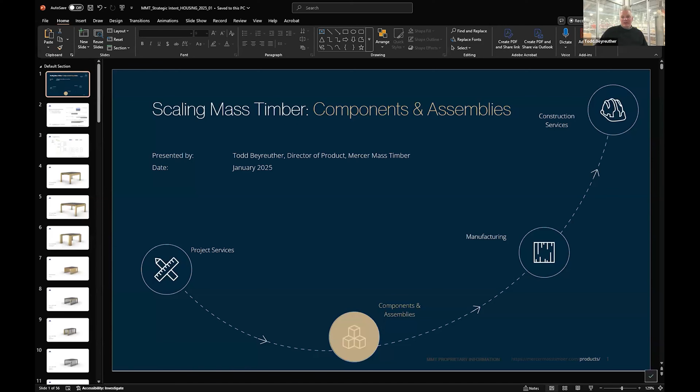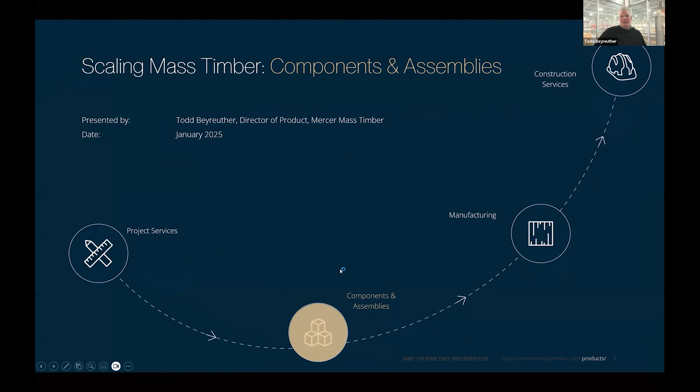So I thought it would be fun for me to show some of the work in progress. So often we're presenting our companies in terms of the projects and the things that are in motion and competitive advantage on the project side and manufacturing. But my world is more of components and assemblies and trying to bring materials and things to markets we maybe haven't developed yet and maybe aren't the bread and butter of what you see behind me, which are more standard big commercial office buildings and institutional buildings and so forth. So that's still our sweet spot up top, like others in the blue.

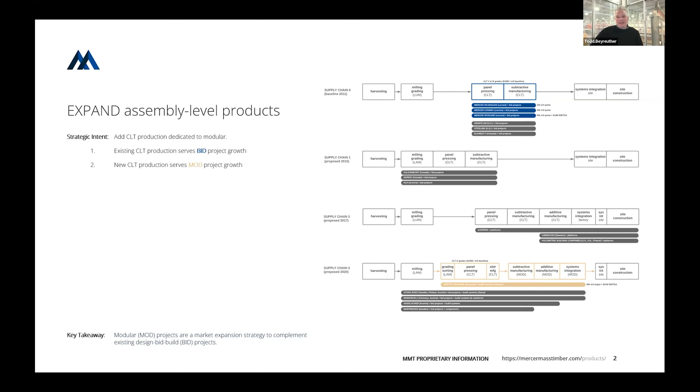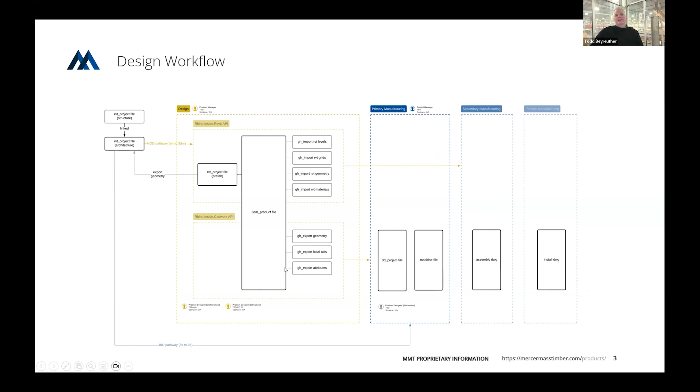But a lot of my focus lately has been on how we get into housing, industrial, and I know that that's shared by others on this call. In that, I've been spending all my time exploring different workflows also, not on the bid pathway, which is typical IFC to cadwork to machine file, shop drawing, so forth, but rather really diving deep with Rhino.Inside, Grasshopper, doing a lot of the scripting stuff that we've been doing for years in architecture and structural engineering, which is my background. But then finding those workflows with Rhino.Inside Revit, Rhino.Inside cadwork, and trying to grab more of the APIs, and it's working. It's been fun and it needs a lot of engagement back and forth, even contractually, to figure this out.

So obviously, big post and beam, bread and butter, interest in two-way, hybrid. Going really fast just because I'm just trying to get to some of the interesting R&D stuff we're doing. We do have a strong interest in cold-formed steel, bearing walls, so forth. But if you joined us last year at the Mass Timber Conference, I displayed a couple different structural build systems, and what these really were was test specimens. So we took 2 of these and we're trying to find the spectrum between load-bearing CLT walls all the way through what I call light timber framing with CLT.

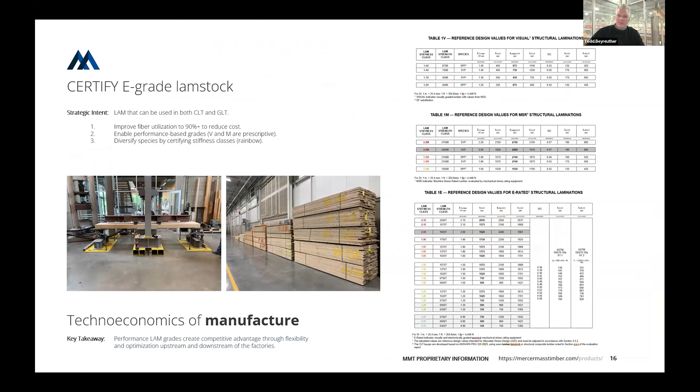And we're trying to bring everything from the material, the components, the assemblies, and maybe even the systems through different code pathways. And I'm just going to go quickly through this because to get there, we need to focus on some of the grades of material. And what we're going to work on in the next grades we're bringing to market are electronically graded E-LAM. And so I'm going to come right back to that after I get to some pictures from the lab. I can also touch a little bit on the LCA work we're doing from the sourcing.

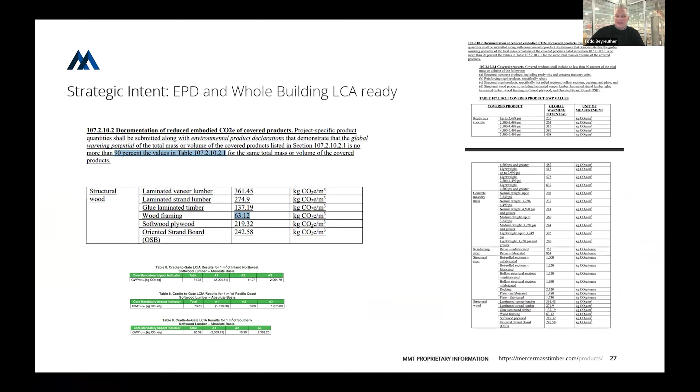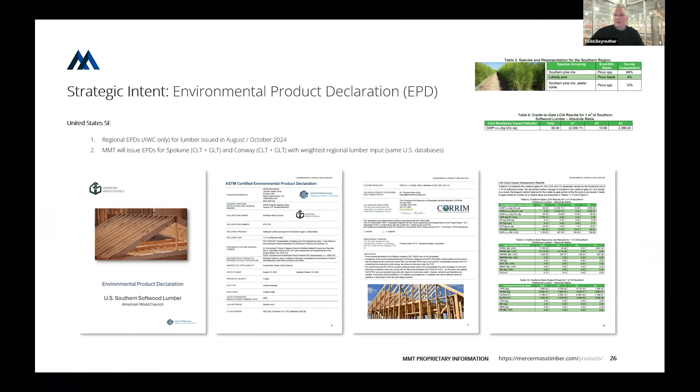I'll stop here just for a second because what I just blew by was, if you're tracking the recent AWC EPDs for lumber, I'm really excited that collectively we're getting to regional sourcing so that we can start to account for LCA from whether we source from coastal US, inland US. We're working on inland Canada since our proximity in our Spokane and our Okanagan factories, and then of course the

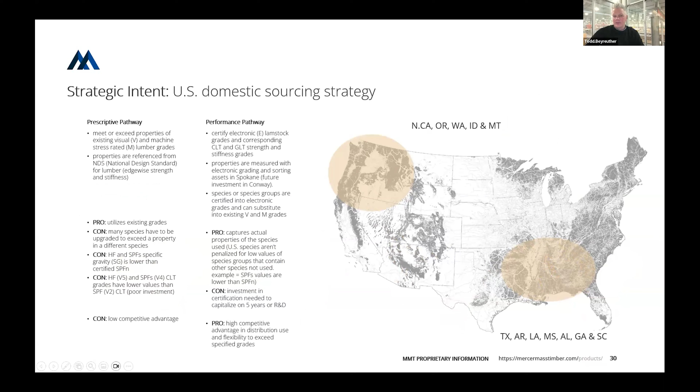Southeast. And I don't mean this to be a presentation on environmental impacts, but because we have factories in both these corners, it's of a lot of interest to us to really start to dial that in, working longer term with partners on whole building LCA, all the way to mill and factory specific.

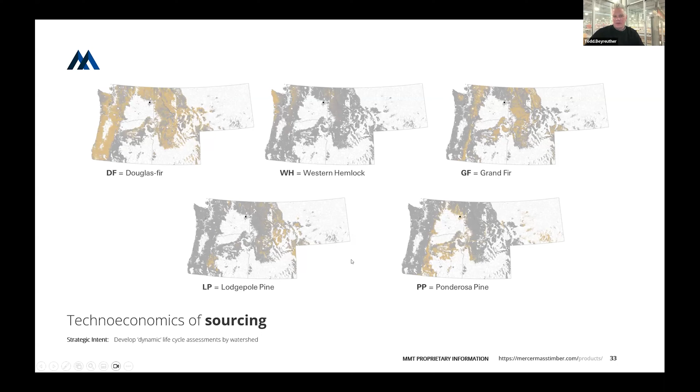But where I'm going with this is the ability to use different species and try to move the market more towards a performance-based specification that allows us more flexibility. I'm just showing the Pacific Northwest, but this applies to the Midwest, to the Northeast, when some of the different species that aren't as common in our mass timber products. And so in that,

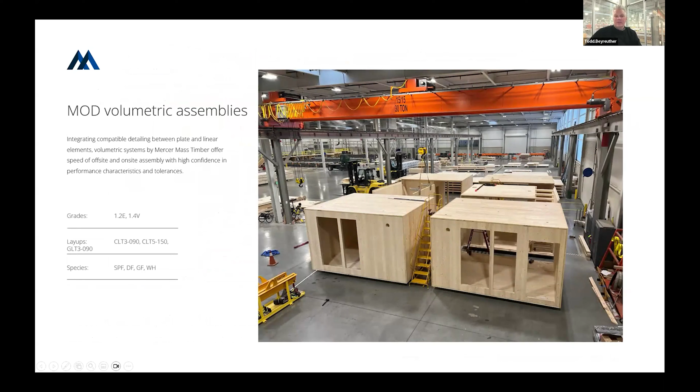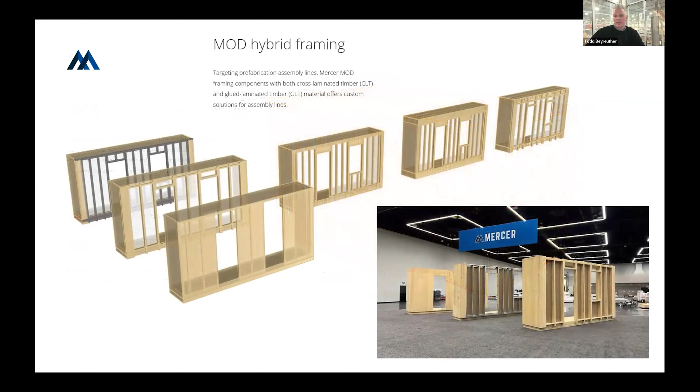when I want to show some of the work in the lab, modular is one of those target markets that I mentioned. Obviously industrial and so forth, but I think they all go together. But in the residential space, that leads us to thinking about certification of components, and those might be CLT and glulam framing. So the studs, the posts, the sub-assemblies that start to displace bundled studs and others

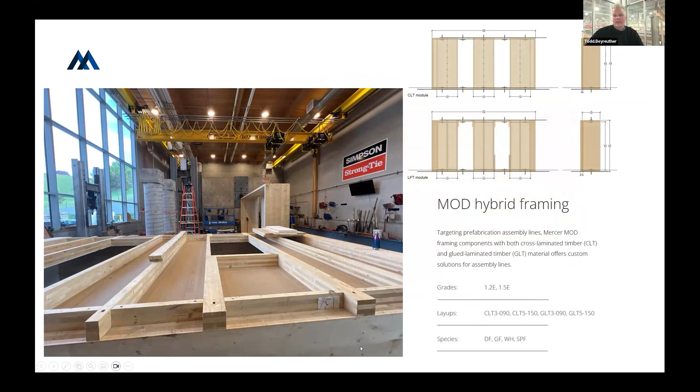in light framing. But this is what it looks like, and this is what we're testing under some federal Forest Service money. So in the lab, we're trying to get towards more European type light timber construction. This is from Finland. We're thinking about how we might reimagine decks.

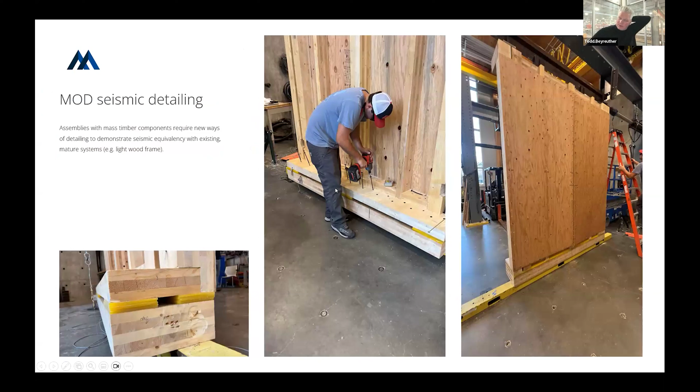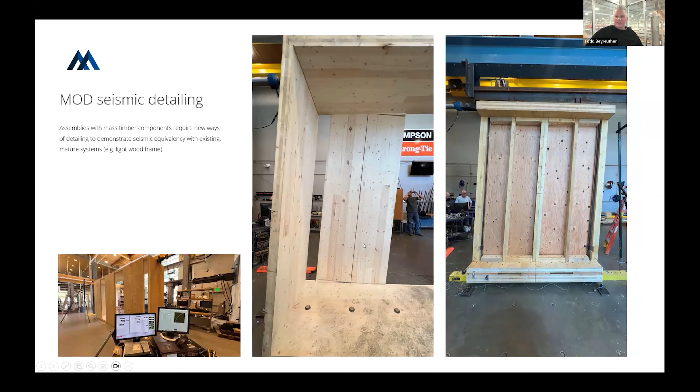But this is the main target right now, these shear wall systems that are equivalent with CLT studs and CLT framing. This is a whole different presentation, but I just want to put out the way we're thinking about this is to try to get to equivalency of light frame walls integrated with our mass timber systems. And then this is fresh.

This is yesterday, taking some of these studs that are ripped out of the panels along with the bigger plates, and I have the preliminary data. I'm not ready to disclose it yet, just because we need to go through it. But really pleased and excited with where these strength properties are starting to land. And I think this will tie in a little bit later when Tyler and others start speaking, because this is kind of a real specialty of theirs also in getting into framing components with their product.

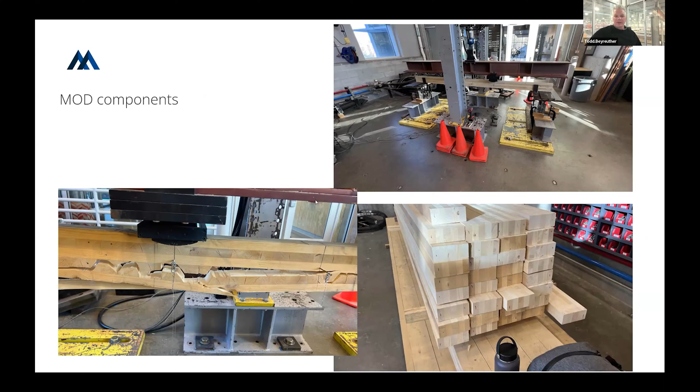So I'm going to quickly skip to what I would like to show more at Mass Timber Conference, and these are works in progress. I'm showing you right out of InDesign, but back to how we get there. And we think with our current grading capabilities, we want to make this open to the industry, that we can start to move towards a stiffness and strength class of the lam stock, but also of the material of CLT and GLT. So I'm showing you, these aren't real.

So PLIB, if you're watching, I'm giving a little free plug here, we think this is one of the agencies that can really dial in with us on the left, the proposal that we're doing tension lam stock in both CLT and glulam products, but it doesn't exclude MSR lumber or visually graded lumber on the right. So we can still use the NDS lumber values and qualify into those stiffness and strength classes.

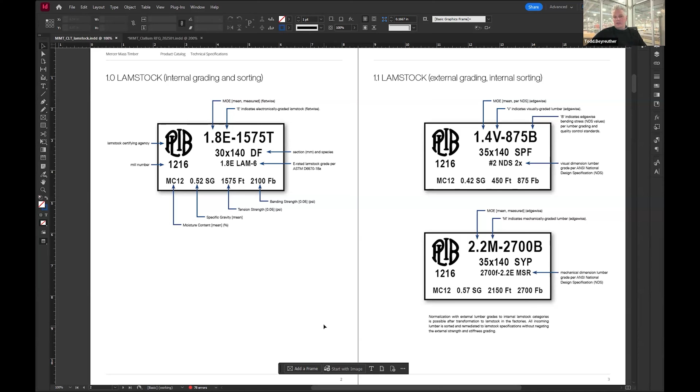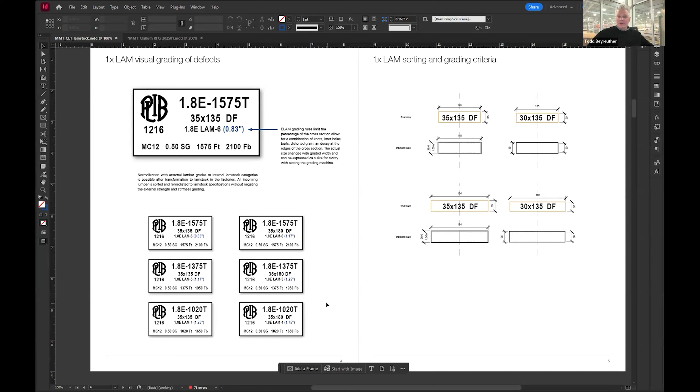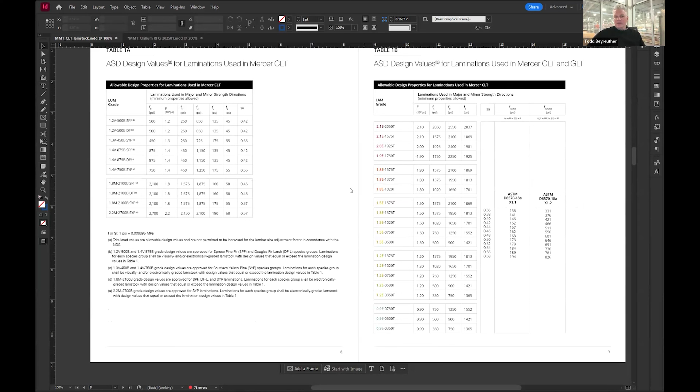But what it requires from us as engineers and architects in particular is that we start specifying the performance requirements, not so much of the lam stock like I'm showing you now, we'll take care of that part. But as we start to get to the CLT, it allows us a lot more flexibility in the different grades of lam stock that we can put into the CLT, and we can move towards something that looks like this in

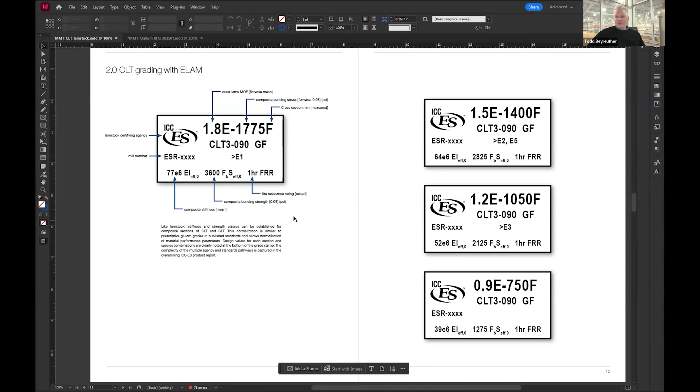an ICC-ES report that is a stiffness class of CLT with a strength category, a lot more like we think about glulam. And then in this, you can see the CLT 3-ply 90 millimeter, and then that species specific that qualifies into this stress class. So this isn't real yet. This is the proposal, but we are moving towards that type of grade.

And then what that looks like is we can still have our V and what prescriptively in the PRG 320 we call the E grades. I call them M grades because they're MSR, but then it also opens up for this rainbow of designing towards stiffness first, the different colors, and then within each one of those different strength categories.

So I'm going to stop there. I know that's very geeky, but I thought maybe this was an ideal forum to throw a bunch of ideas out for feedback. And please find me before Mass Timber Conference, but also love to talk and get feedback and criticism on this. A lot of this is also informing some of the work that I enjoy and spend a lot of time at the code level.

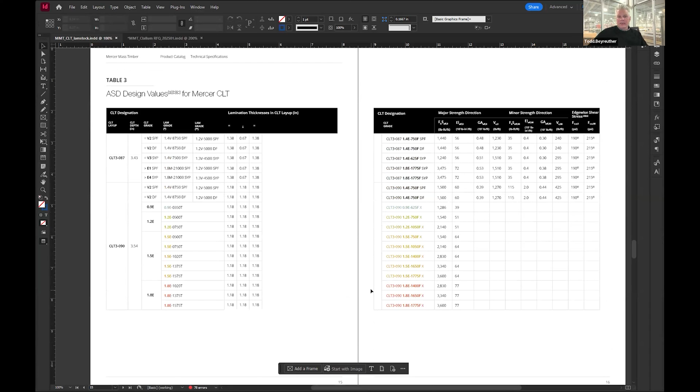I'm currently on the State Building Code Council in Washington, and we've been working on a couple proposals, and one of those is to allow more of these flexible lam stock grades in CLT.

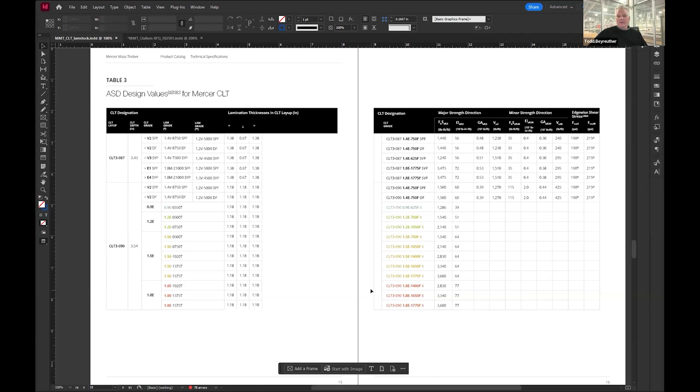So okay, I'm going to take a breath. So thank you, everyone. Great, thanks, Todd. I think the next person that will pass the baton to here is Tyler. So Tyler, if you want to go ahead and share your screen next. Certainly. Is that working, everyone? Yeah, we see that. Looks good. Okay, well, for some reason I'm not going into presentation mode, but there we go. Okay.

So one of the things that people always talk about our product is that it looks a little bit different than CLT. We are CLT. We're approved under the same PRG 320 code. We have additional requirements under ASTM D5456 to qualify our material as an LVL grade or structural composite lumber. But it does lead to a different characteristic when it comes to implementation in a building.

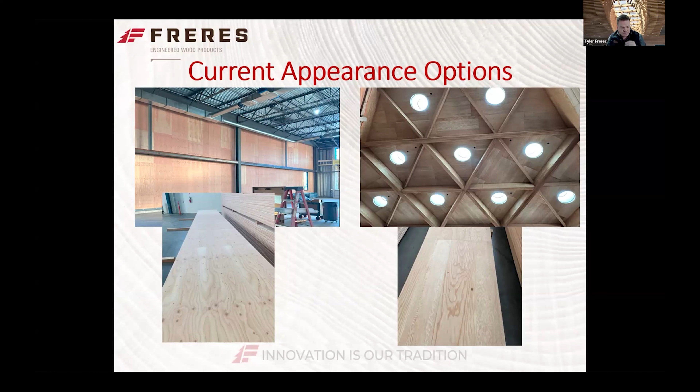But we're working on a couple other things here, and this is something that we've been implementing for a little while, but it's really coming to fruition, where we essentially break our 4-foot wide panels down into smaller subsections and then reintroduce them into the system. So what that allows us is that you can end up with much more of a board appearance like you would have with a typical CLT product, but with the same type of performance that you would get with a built-up LVL panel.

So to be clear, the one on the left is exactly like how we make our normal material, but just the outer layer is broken down into more randomized boards, so you can end up with a little bit more of a randomized appearance, randomized hues and tones throughout the entire material. And the one on the right is exactly like our HD material, where we've done the same thing and broken it down into separate sections to create that kind of randomized appearance with hue.

A couple other things we're working on is an edge grain appearance. And we actually have this in place in our warehouse structure on our own site. And it's a beautiful type of appearance. Unfortunately, at this period of time, we can't count that outer layer towards our structural performance. We know it adds to it, but we essentially have to be a monolithic sort of layup with all of our LVL grades within a material, and it's really difficult for us to get qualified with adding this sort of differing grain pattern within an MPP panel.

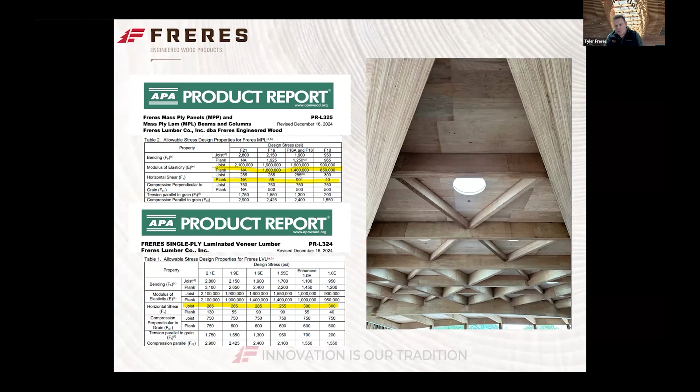So our 1.0E, if people aren't aware of it, that's typically a material that we use for a point supported slab. So something that has two-way action within it. It has about the same performance across the minor force direction as you have it with the major, but I'll jump into that a little bit more too.

Recently, this last year, we completed some additional blast testing with the Department of State and the DoD. I figured it's always fun to show a video of something exploding.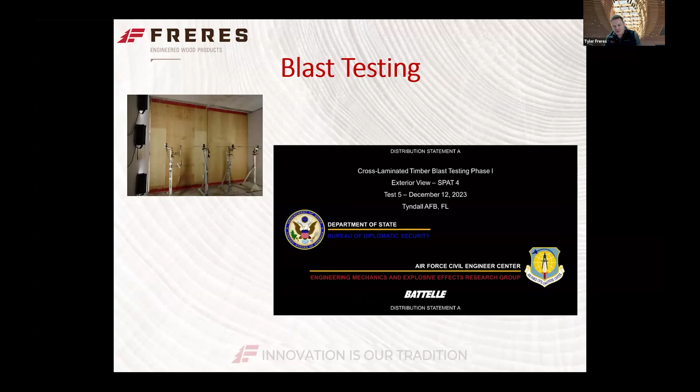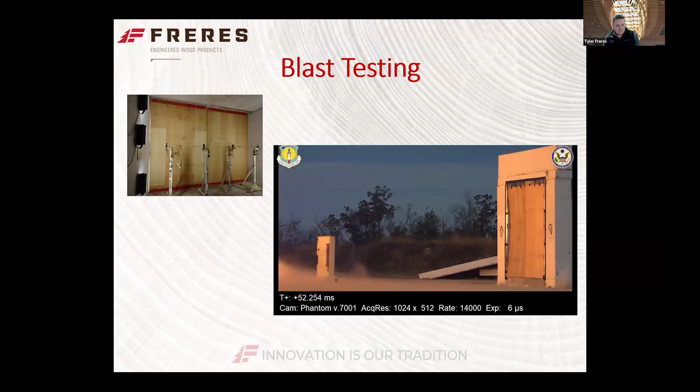So in particular, the two materials that they tested here were a 4-ply or a 4.08-inch material, as well as a 6-ply or a 6.12-inch material. The 4-inch did fracture across the middle section of it, but still was considered moderate damage. But the 6-inch, there was no significant damage whatsoever to the panel. And these tests were all conducted under the auspices of the Department of State at the Tyndall Air Force Base in Florida.

So luckily this last year as well, we were able to complete a point supported slab testing down at Oregon State University with the REACTS program. Got to thank Ian and the rest of the team down there for helping us coordinate this testing. It was really important for us to get this in the works. And I can happily say that as of yesterday, we've received the final non-draft report. So that's available if anyone has any interest in point supported slab for multi-story construction.

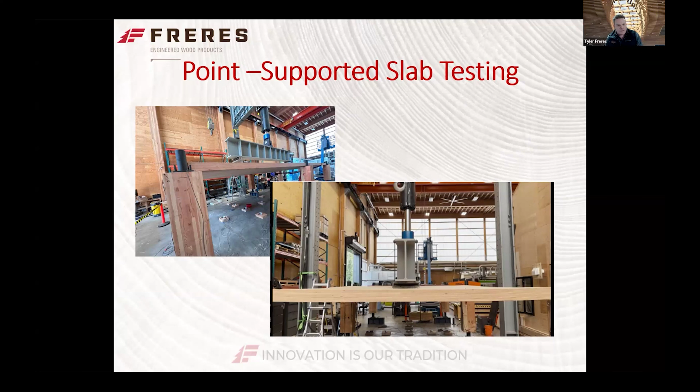So essentially, we ended up testing those panels on a 12-foot by 16-foot grid. The panels themselves were 12-foot by 32-foot with a 5-ply and a 6-ply. You can kind of see some of the performance results there, but at the end of the day, we were able to substantiate a 12-foot minor force direction span, 16-foot major force direction span with a 6-inch panel.

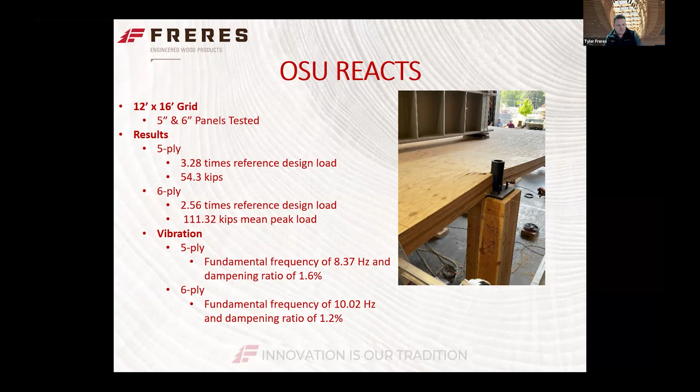This is a project that we just finished shipping the last panels to, but I figured it would be a good example to show you guys as far as what we're able to do with our mass ply lams as substitutes for glulam material, but also with our large format panels. These were very thick panels. A lot of them were up to about 9 inches, and so were the beams. The beams are sistered together into 27-inch wide sections, and they're all on a curvature over the entire roof.

They also chose to go with our high HD appearance. So this is predominantly a clear veneer roof and also on the beams themselves. So really nice aesthetic, and really one that I'm looking forward to visiting in person here in the near future.

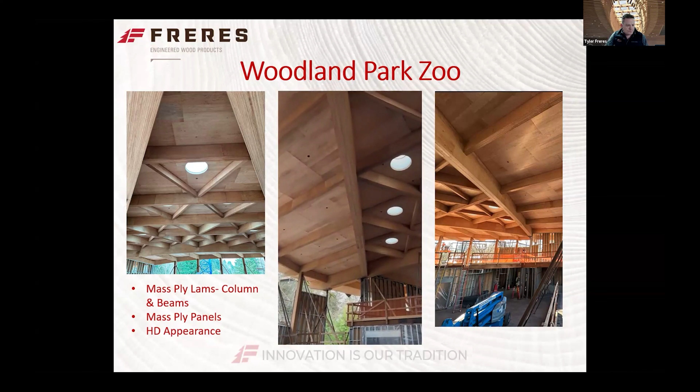One of the areas we really want to get into is our warehouses and data centers. It's been the talk of the town—the amount of investment in infrastructure they intend to put into data centers here in the near future is mind-boggling.

As we all know, the tech industry creates a lot of environmental issues from consuming a ton of energy and using a whole lot of rare earth metals.

So they've got to find some way to get a little bit of environmental virtue into their system. Wood structures are a great way to sequester carbon right at the beginning of the building, so we're really looking at these types of structures.

This warehouse is 59,000 square feet, with a grid structure on a 40 by 48 foot layout. The walls were done much like concrete tilt-up construction, with no exterior beam or column—the exterior walls are 4 inches, and the roof joists are supported by the walls.

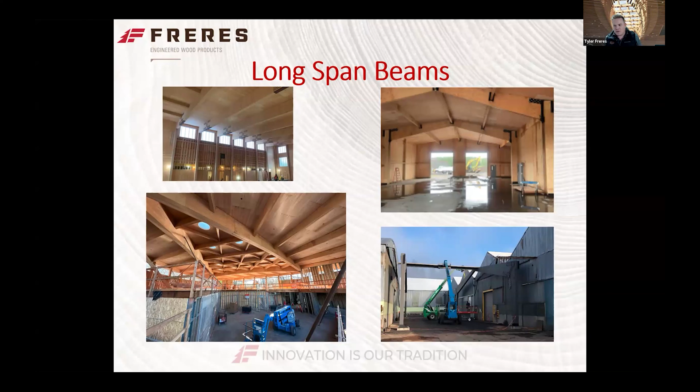So with that is about all I have. Thank you guys very much for your time.

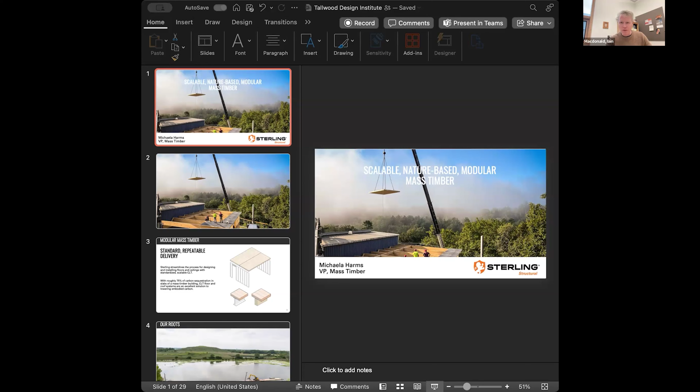Hey Michaela, you're not in presenter mode. We're seeing it dark. Oh, I'm so sorry, I'm seeing the thing. It's not in presenter mode. Sorry about that, you guys. No worries, thanks for letting me know. All good, let's see—this is funny, I've never had it do this before. There we go, let's see if this works. Is that now in presenter mode?

Yep, it's all good. Okay. Thank you so much. Thanks for letting me know. We're a Teams group, so sometimes I'm not as good on Zoom.

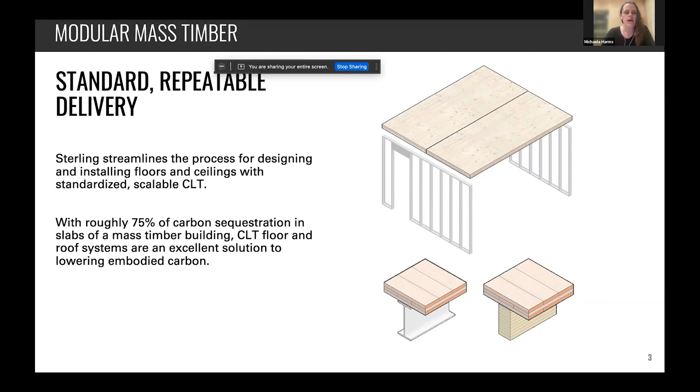So Sterling, we're really focused on how we can standardize the CLT as a product specifically for scale and repeatable delivery. We think it's a great opportunity for our built environment from a sustainability perspective, because if we look at mass timber buildings, about 75% of that carbon sequestration is really in the slabs, in the floor and roof systems. So that's where we try to focus. We try to be a little bit more agnostic when it comes to beams and columns and things like that, and working with lots of different partners, but really to get this into as many building types as possible.

And this mentality towards modularity really comes from what our roots are. Sterling's been manufacturing CLT since 2015, and we are the largest manufacturer of CLT in the world, but the majority of that currently, not for long hopefully, but currently goes to our industrial matting business. This is a really cool application of cross-laminated timber and wood products that not many of us see every day. There's so much infrastructure development out there, and this material uses forest resources, and we're not treating these, so we're not introducing anything into the environment. It's just a really fun, exciting other part of the mass timber industry that we don't talk about very often.

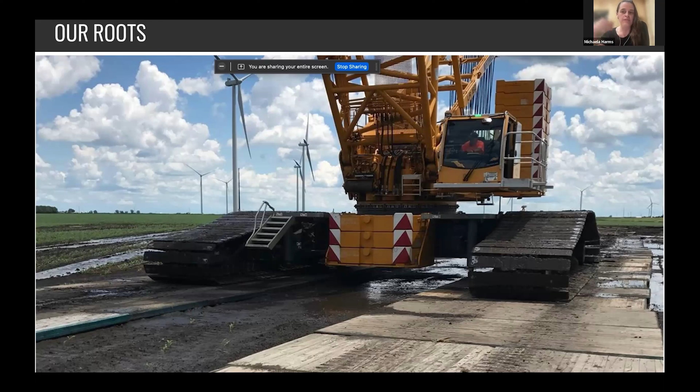So I always like to go back to our roots. The reason I go back to it is because, as you can see here, these are just many, many, many rectangles. Our manufacturing facility is set up to produce at this type of volume. We make a panel every 65 seconds.

So when we think about that, we go, all right, how can we start to make more of a module approach, a productized module approach to the mass timber industry, so that we can get into really scalable development and use that ability to produce very quickly, and get this product into more building types and a wider construction market. So how can we compete with steel decking and precast concrete and all of that kind of stuff?

So the industry, from the steel decking perspective, is very used to specific sizes and working off of those type of modules. We run on a 14, 16, and 18-foot length module, and that's all based on the existing lumber supply chain. We're one of the largest private purchasers of Southern pine, so we get great pricing. We're able to then just take that 14, 16, and 18 foot, and then 8 foot in the cross layer stock lumber that is sold for many other uses, and bring it right into our line and turn it into our cross laminated timber.

So that's what guides the initial modules. And now we're really working with designers to say, okay, it's great to be able to make these very complex CNC structures, but it's not the most cost effective, and it's not the most waste effective. So how can we start from this module and maybe limit fabrication first to 50% of panels, and then maybe limit fabrication to 20%, and then maybe even 10%, so that it's becoming more of a distribution commodity style product.

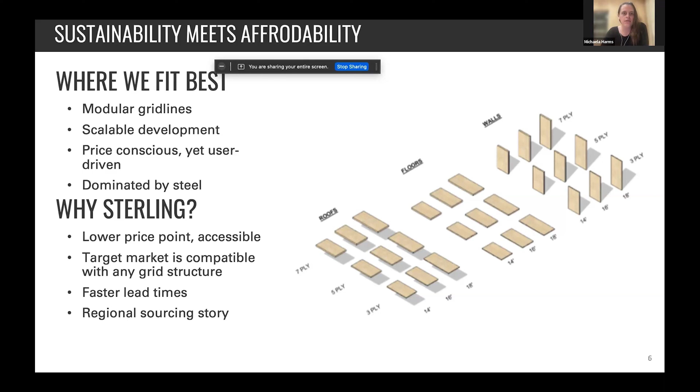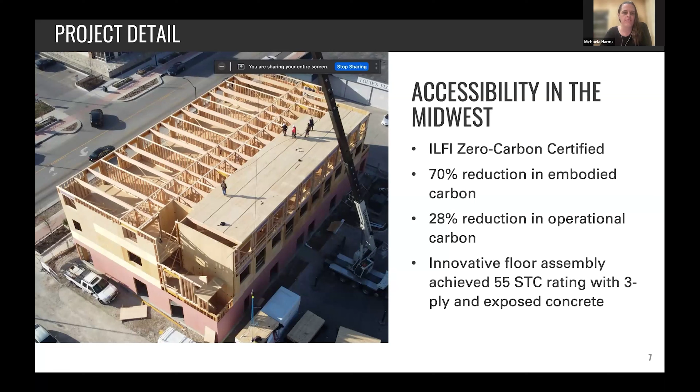So the first project we'll look at that is kind of taking this approach is from Cutler Development. They're a development team based out of Des Moines, Iowa. When we talk about affordability, when you're in the Midwest, affordability and affordable housing is a very different point than on the coast. They've really done an excellent job of looking at what the formula is to get mass timber into their buildings and make it pencil.

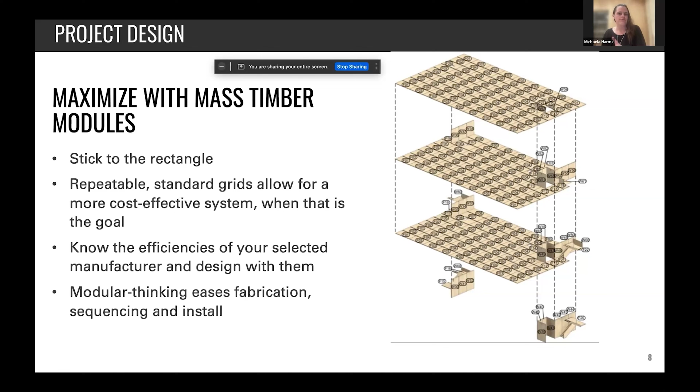So we worked with them again to kind of maximize their construction with that module approach, focusing on those repeatable standard grids, and understanding the efficiencies from our perspective and working with their design team so they understand kind of the design for manufacture. Where does it really make sense to add in that extra fabrication, and where does it make sense not to do that?

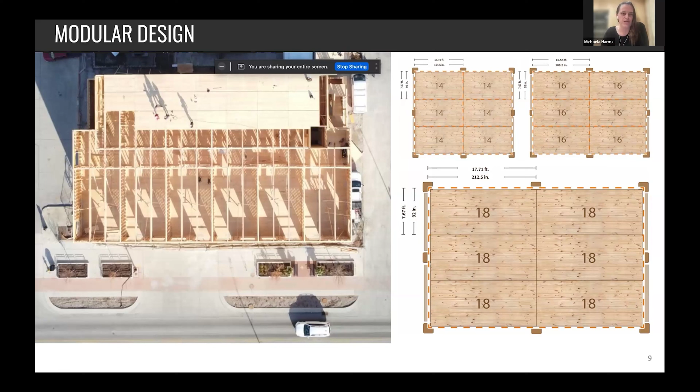So you can kind of see here, based on different grids and different building typologies, how we can look more at starting with that module from the very beginning to create these very repeatable elements that are also much easier from the logistics and sequencing perspective, because now not every single panel is an individual custom panel. So we work with these teams to keep it very repeatable, and balance all of that, working with other installers and GCs to be sure we're doing the things that make it the easiest on site.

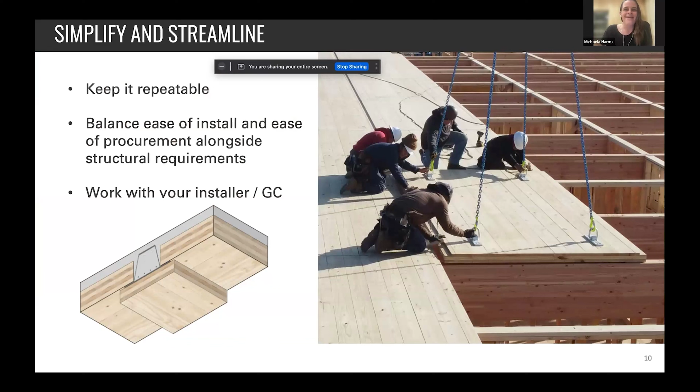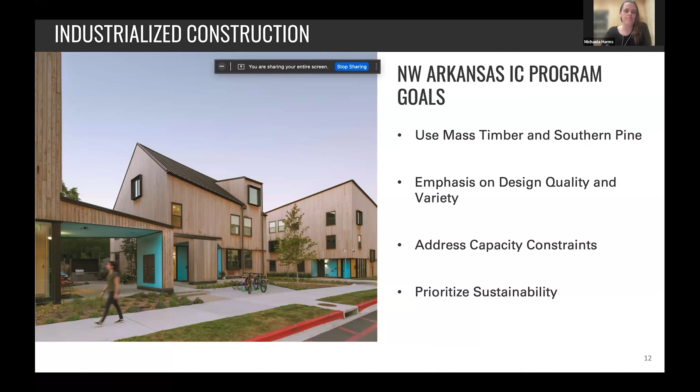So a second approach that we've been working on is more from the industrialized construction program approach. This one is out of Northwest Arkansas, and this team really wanted to use mass timber. They wanted to support Southern pine, and they're really prioritizing sustainability to bring in a good workforce. How can we make housing and environments that people want to come live in, because they have such a need for workers in that region, and bringing more people in.

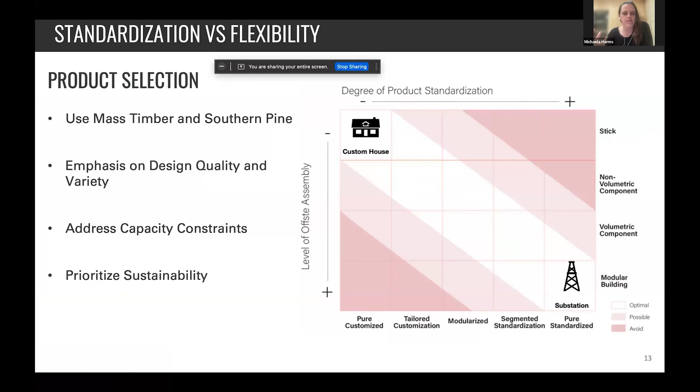So we talk about this kind of level of product standardization versus level of offsite assembly, and this is really how we started to build out this industrialized construction program. We really wanted to take a more productized and panelized approach, looking at the CLT floor systems alongside modular bathrooms and kitchens, which made a lot of sense for this specific construction type. It's a little bit more optimal for this specific project than a full volumetric dwelling unit.

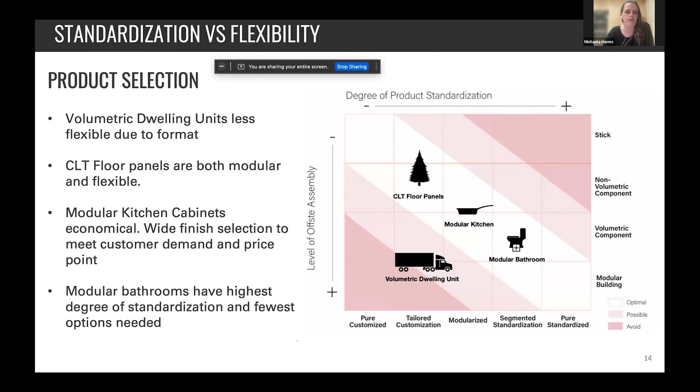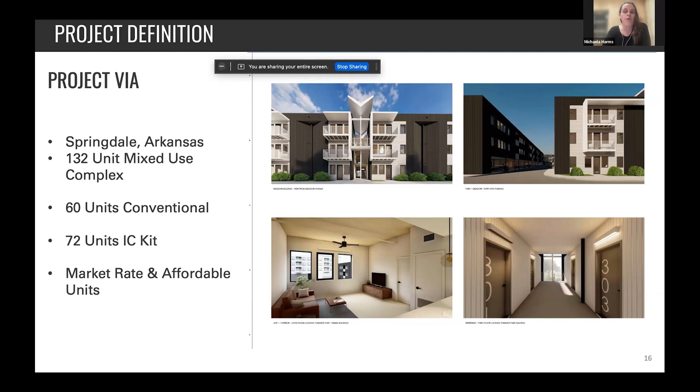We worked on this with an excellent team - Aspect, Modus Studio, Modly, Blue Crane's developer. It's 60 units of conventional construction. This is a really unique project in that half of it is 2 buildings that will be stick frame, and half of it is this industrialized construction approach. The developer is actually going to release all this information of what they learned as a cost comparison for both of these approaches on the same site, which we think will be very exciting, and hopefully something with release through Woodworks.

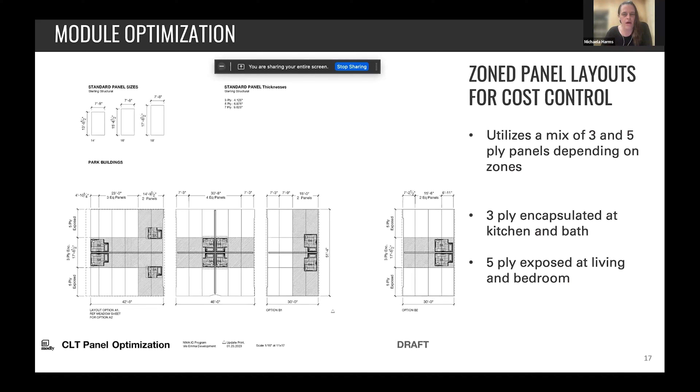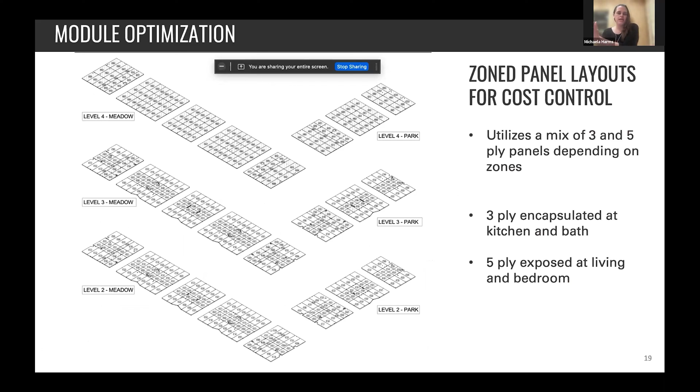But as we looked at the productized approach, we really broke it down by zones with this team to look at optimization of mixing 3 and 5 ply panels for the zones where they were required. That really got this one to an excellent price point to make these structures a bit more affordable. Here's some examples of test fits for those different areas, and seeing how that module extends all the way through the different levels of these 2 buildings.

We all know this, and I don't think we can say it enough. Contracting early and getting the design team - the architect, engineer, and construction teams - together early tends to really help keep these projects streamlined and going forward quickly. What we found was, with this project specifically, is at this point, we're already within 5% of the stick built cost. So we're excited to add in what we think we'll get out of the schedule gains.

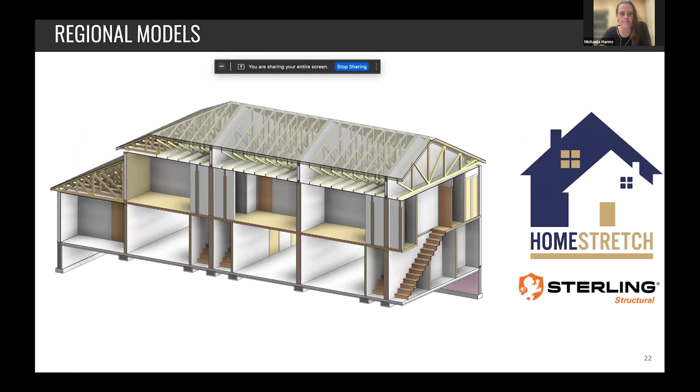Contracting early, planning long, and executing fast is really the name of the game when it comes to this industrialized construction program. Last but not least, this is right in the Midwest. We've been working with Homestretch Development. They do exclusively workforce housing currently in Michigan. He was another great approach of, hey, where can this make sense within my building? So for all of his projects, we're focused exclusively on the floors - it's a mix of SIPs and traditional stick frame and CLT floors.

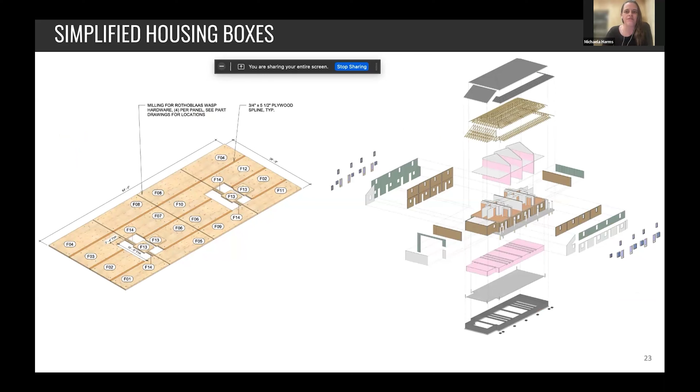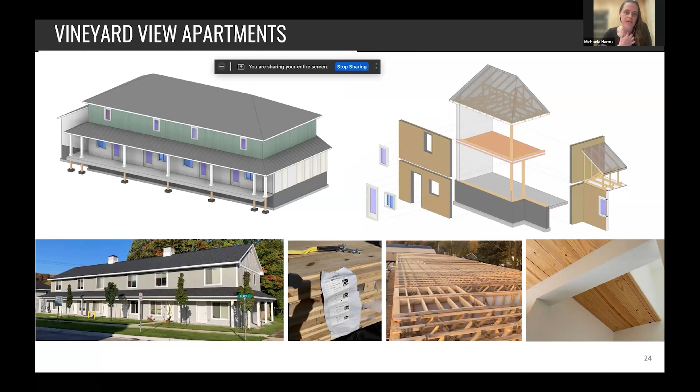It's been really cool to see how all of his specific projects are coming together. We're looking now, as we've built out this program - I think we're on our 5th or 6th building with Homestretch, incorporating Michigan wood into the project.

So why we talk about contracting early is because manufacturers, especially when they're able to work with the architect, engineer, and construction teams, can offer a lot of these extra design assist, project management resources that if you're in with the collaboration early, you get the most benefit from. We learn a lot. We still do projects where we come in late and we learn that it's just not as efficient. So we're trying to work with these teams to continue to build out better collaborative and early approaches here.

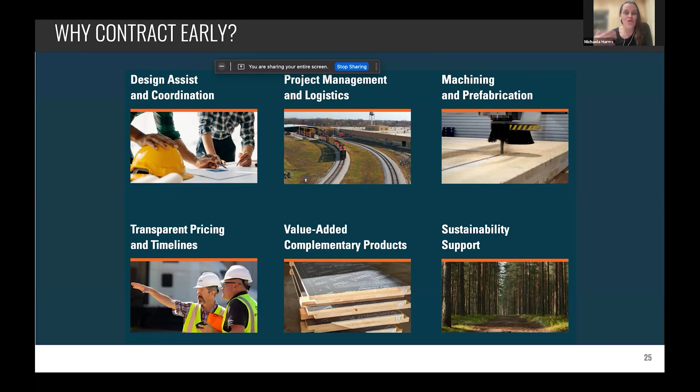So I'm glad that Todd is bringing up the different species and some of those more performance-based metrics. Obviously Sterling is a little bit different in that approach, that we're trying to buy exclusively #2 material directly off of the market. Right now we're selling Southern Pine out of the South. We've also been certified now for Spruce-Pine-Fir South, and have been focusing our sourcing for those in the upper Midwest, the Great Lakes region, and New England, and then also Eastern Hemlock from those 2 regions as well. By adding to our offerings, we're hoping to work with different teams that want to be utilizing their local resources directly into their projects. Sterling currently and will always buy 100% US wood.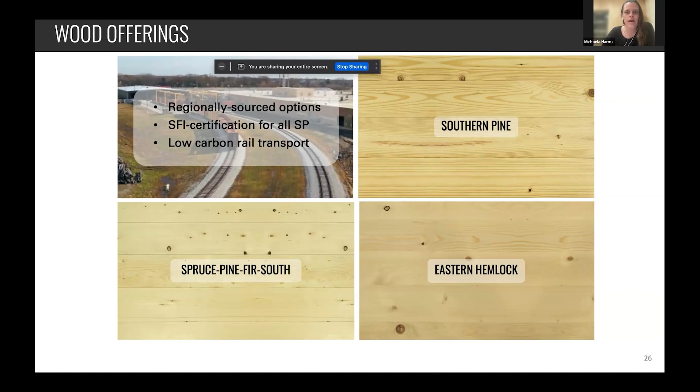And we try to work with glulam manufacturers as well who are buying US wood, again, to just keep that regional sourcing story present for these buildings. And so, from the specification standpoint, we think it's really important to make sure we're sharing with teams that they understand the impacts of those specifications.

I love the move towards a performance-based specification because it does give all the manufacturers the opportunity to put the best product forward for that project.

Because when we add on some of the extra certifications, sometimes that can really limit the supply chain, for example, or if we have a very prescriptive only-this-grade approach, it can really limit the opportunities of the supply chain. And that ends up making lead times a bit longer. Freight can be more complicated. There's an opportunity for infinite layups, but what's really available on the market?

So we try to educate teams on what we have available, what we know our glulam partners have available, what's available on the market in general, so that we can compare those things.

And we think certifications like FSC, SFI, and all of the extra things are great, but we also don't want that to be the reason that you went with European wood or the reason that you didn't go with wood at all. So it's important to really think about what those specifications can do to a project.

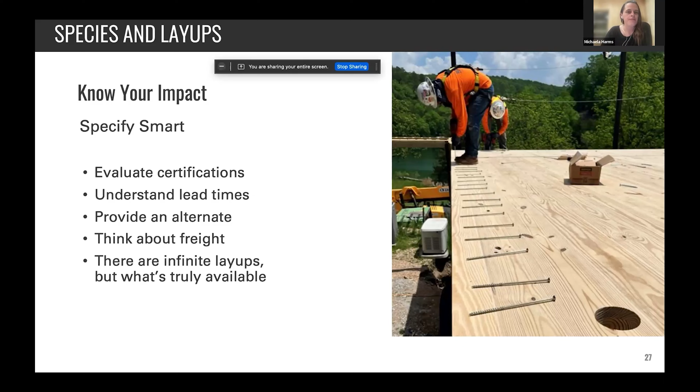And then finally, really comparing costs holistically. We're really excited about the industrialized construction program results because we'll be able to actually have real built projects on the same site next to each other, where we can compare that entire structure, the entire construction life cycle, and everything like that—and which off-site items are included in the factory versus not.

Those are things that we think really help that better comparison so that we know we're really going apples to apples. And then another big one is regional labor pools are so different in so many regions. So what we've learned is really getting those installers involved as early as possible can make the project more efficient.

It can help you understand—hey, if your MEP is really late, you really got to talk to your installers, because maybe they're better off cutting the holes for that stuff on site. It's not always the answer, but it's good to have that conversation early.

We had a project where they had wonderful timber framers on their team, and they bought direct commodity glulam and cut everything on site themselves. And it was great for that project, but I can tell you that doesn't work for every project. So having those conversations is important.

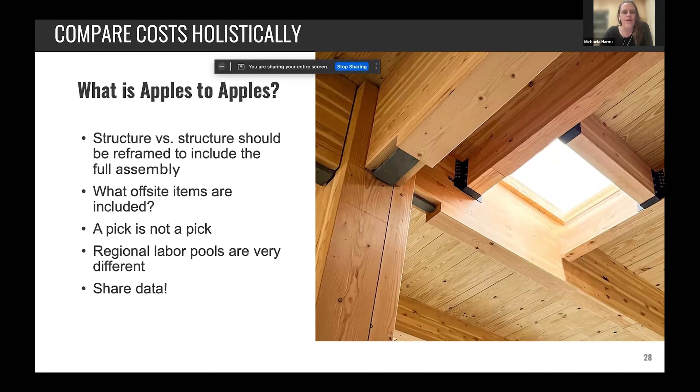And that is where we are at currently. So thank you so much.

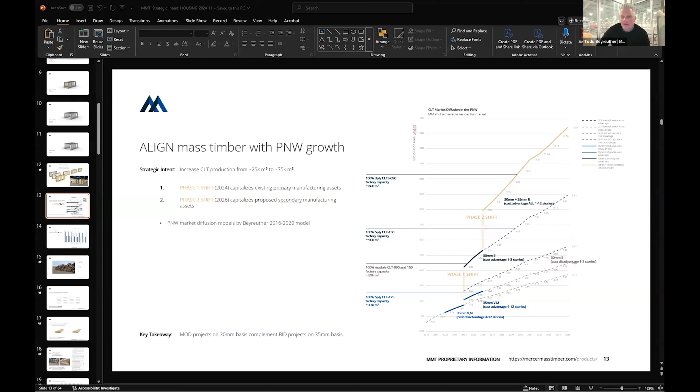Todd, do you want to chime in on that? Well, if you entertain a diagram, so yeah, we need to grow the market. We're not an industry yet, and by definition we're less than 5% of the market, which means we're very good as an industry saying, hey, we like doing these big commercial, institutional buildings because they compete with steel and concrete construction types, so they're cost competitive, and they are.

But how do we become cost competitive in industrial? How do we become cost competitive in housing? You're hearing a common theme there from all the manufacturers. And I show this diagram, and it probably needs a little more unpacking, but we've done market diffusion models collectively, the state of Washington with University of Washington and Hartwood at the time, and believe the models or not, but the intent here is shown on the bottom: we're in this pathway of slower growth.

I know you see a lot of hockey stick diagrams of the market and so forth, but you also have to look at how fast a product diffuses into the market and what we can do to accelerate it. And so some of the common themes you're hearing about, like Sterling saying, here's the strategy of standardization, of trying to drive down that cost. I was recently reverse engineering with a partner who was looking at multiple bids, and they all landed in about the same ballpark, and they said, oh, they're all 3% over.

And if you were a mature technology, you'd say, well, we're losing. If you're an emerging technology, an investor would say, all right, that's what I'm going to put my money into. You're winning, because now you can pull 5-10% out in an emerging technology, and scale is one of those strategies, but good design is also. This is my hockey stick diagram, but it just doesn't happen. You have to invest in those phase shifts.

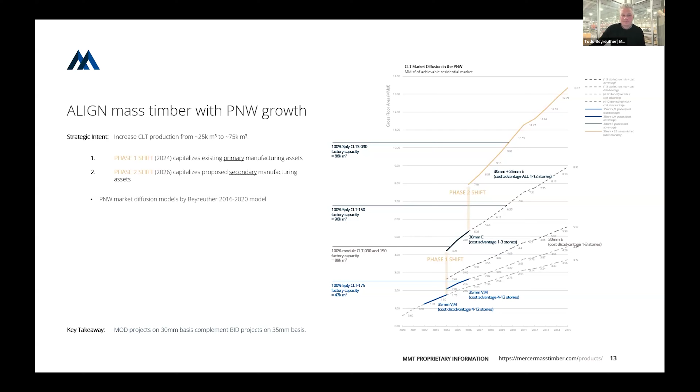Right. Thanks. There's a question in the chat from Carmichael, who says, "Do we have examples of housing projects in the Northwest where these products have been used?" Carmichael, I don't know if that's aimed at a particular company's products or just the products you heard about today, but care to elaborate on that?

Hi, everyone. My name is McCrae Carmichael. I work for the Mid-Willamette Valley Council of Governments, and I'm also the executive director of our Economic Development District for Marion, Polk, and Yamhill counties. And all the districts are working on housing projects, how we assist our members with having more housing. So I'm new to mass timber. It's been on the periphery. I'm curious. Somehow I got to this meeting, I'm listening, and I hear things and I think, right? So what is it?

Does anyone in the whole meeting have examples of housing projects in communities that have happened? I'm Oregon based, but I think there's people outside of Oregon. So I'm new and just asking to learn more. Is there a list somewhere? Oh, yeah, you should go to WoodWorks. WoodWorks lists everything. They have the Wood Innovation Network. Okay. And so that's where you can see there are projects all over the country, and it's really cool to see it right on a map.